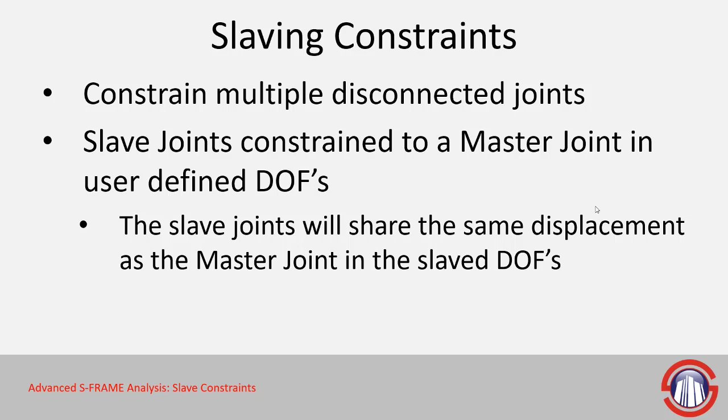So if we just slave joint A to joint B in the X translation direction, whatever X translation joint B has, joint A will also have, but they can maybe translate independently of one another in the Y translation direction, for example. Let's look at an example of this right now.

Here we've got a simple frame with some bracing that we've defined to only resist lateral loads. If we look at this a little bit closer, we can see that we've got a joint connected to the member here with the bracing attached to it. These braces are truss members, so they only support axial load.

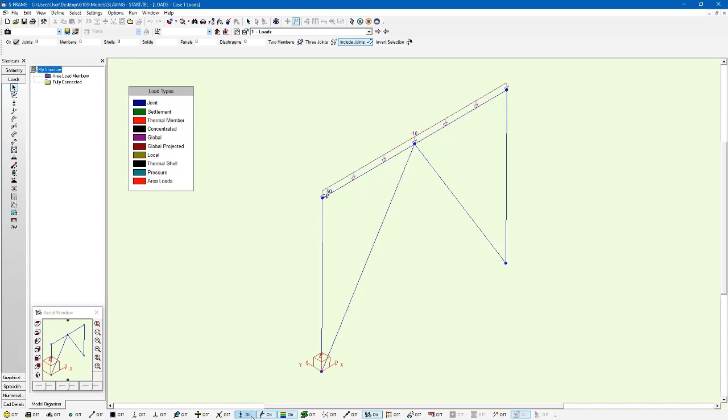And if I go to the loads window and I toggle on the display of our loads here, I can see that we have some gravity loads, or vertical loads, and some lateral loads as well. And if we run the analysis, click Run, Analyze, and run a linear static analysis, we can see that the analysis runs fine.

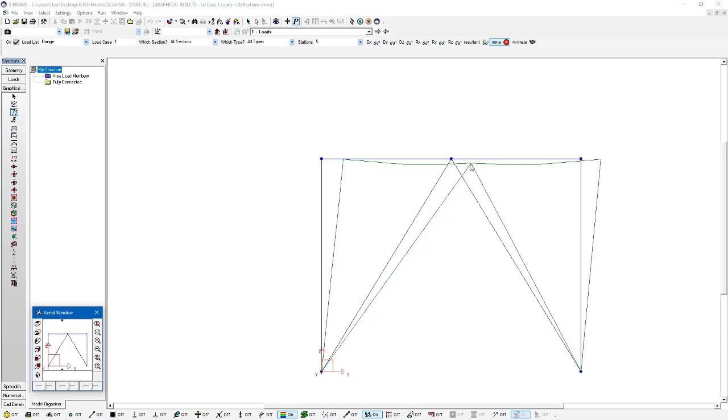But when we look at the deflection diagram, and maybe I'll look at this head on so we can see it a little bit better, clearly there is some influence from this bracing to resist some of the vertical loads. And that's not really what we had in mind. So we would need to consider maybe using slave joints and a master and slave relationship to get this to work the way we want.

So I'm going to go to the geometry window, and using the joint tool, I'm actually just going to right click on this joint here, the one at the middle of my beam at the top of my braces. I'm going to right click and I'm going to go to properties. And this is going to bring up a mini spreadsheet with all the information I need to really understand this joint. You can see that the Z coordinate is at 4 meters.

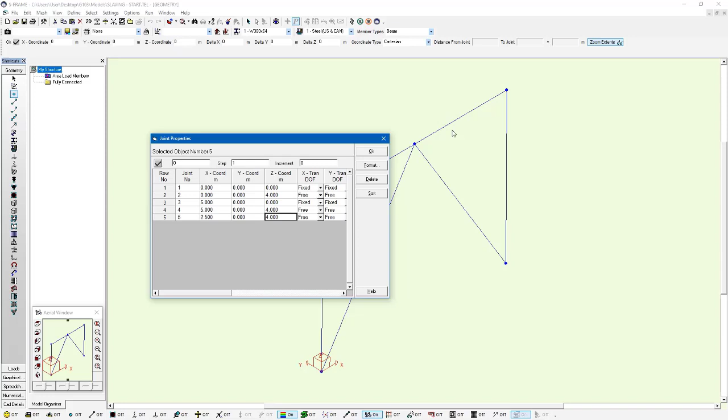I'm actually going to move it down slightly so that it's not physically connected to this member. So I'm going to move it down just 0.2 meters to 3.8 meters. And now you can see that there is a physical separation between this joint at the top of our bracing and the beam itself. I'm also going to add another joint at the middle of the beam here.

So I'm going to left click with the member definition tool, just like I did in previous exercises, and I'm going to add a joint at the midpoint of that member. And you can see here now it's added that joint and it's asking me to define the second point of this member, but I'm just going to press escape to end the command, and now it's just left me with that one joint.

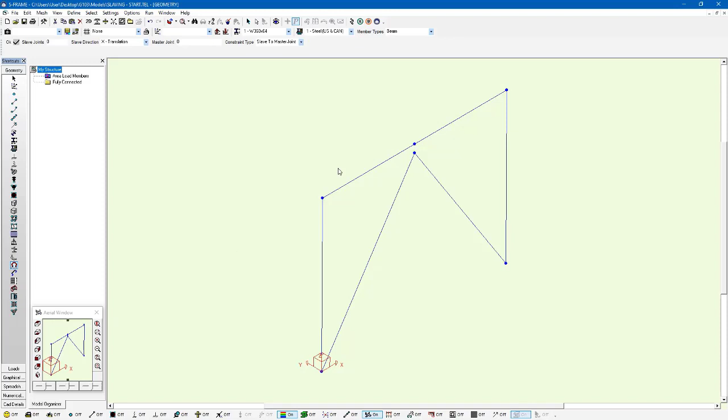And the final step for this process is to specify the slave and master joints. So I can use the slave tool, but it would certainly help that I understand which joint is which. So I'm going to toggle on the display of my joint numbers in the status bar at the bottom of the screen. I'll press this button to toggle on, and we can see that the joint at the top of my braces is joint number 5, and at the middle of my beam that's joint number 6. So I want basically these two to be constrained to one another.

So I'm going to specify joint number 6 as being the master joint. I'll say that master joint is joint number 6, and I'm going to slave it in the X translation direction. And I'm going to left click joint number 5 here to slave joint number 5 to joint number 6 in the X translation direction. You notice it has this little arrow in the X translation direction showing me that it's slaved to joint number 6. So any X translation that joint number 6 has is going to also be applied to joint number 5.

And I'm going to do the same thing here within the Y translation degree of freedom as well. I'm going to keep the same master joint, and I'm just going to left click on joint number 5. And now we've effectively modeled a sliding connection where these two joints can translate independently of one another in the vertical direction, but in the lateral directions, they will basically have the same translation. So they are slaved together in that sense.

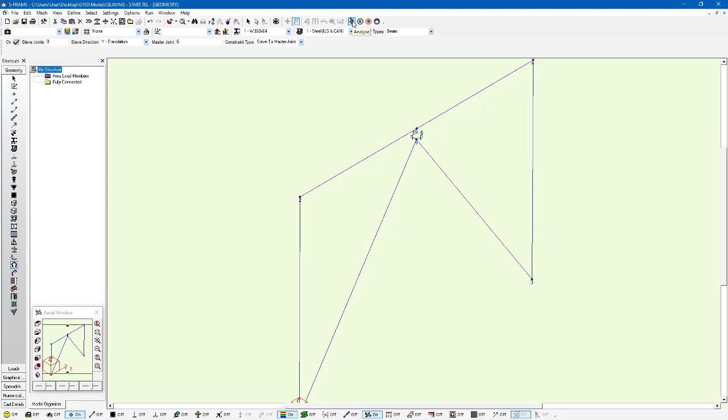Now I'm going to go ahead and run the analysis again. Run a linear static analysis. Once again, we get a clean solution. But now if I look at the deflection, I can clearly see that the two joints there are effectively translating independently of one another in the vertical direction. But in the lateral direction, they have similar deflections.